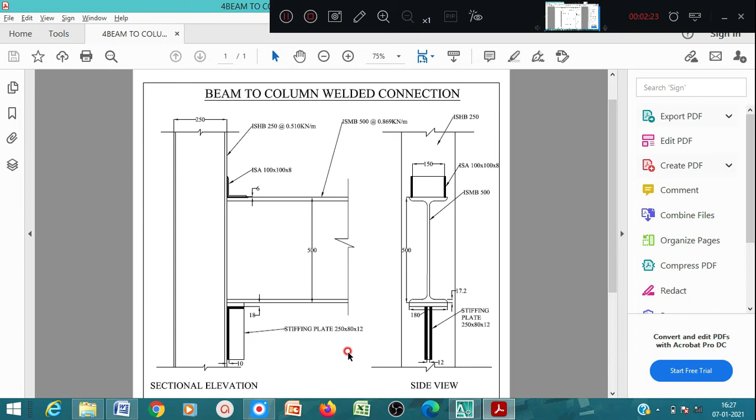So once again we'll have a view of the beam to column welded connection. We have the top cleat angle ISA 100 by 100 by 8, and the bottom part which is very important here.

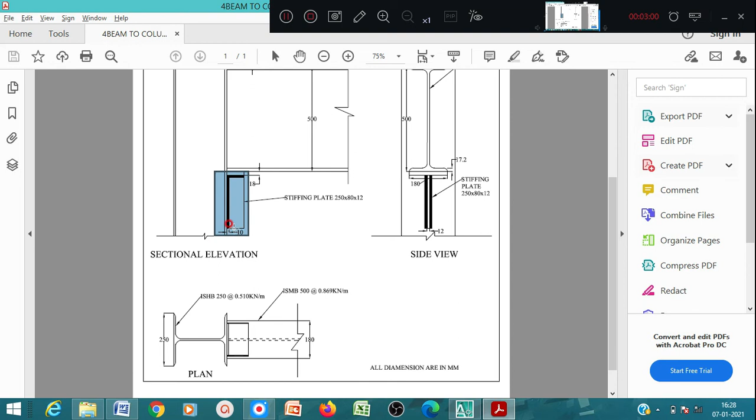Here we can see the bearing plate of width 150 mm, and below that we have the stiffening plate. The size of the stiffening plate is 12 mm thick, 80 mm wide and 250 mm long. So you have to prepare this - 250 mm long stiffening plate. Other things remain the same.

Now we'll begin with the AutoCAD drawing. I have already prepared the line-out for beam and column - you have to prepare the same thing. You can use layers and colors for different activities. For beam I have used green, and for column I have used red color. For other sections, angles and bolts you can use different colors.

Before starting, you have to fix the units in millimeters, and set the limits. You can give 50,000 by 50,000 for that, or even 20,000 by 25,000 since the drawings are very small here. You can go with 25,000 by 25,000.

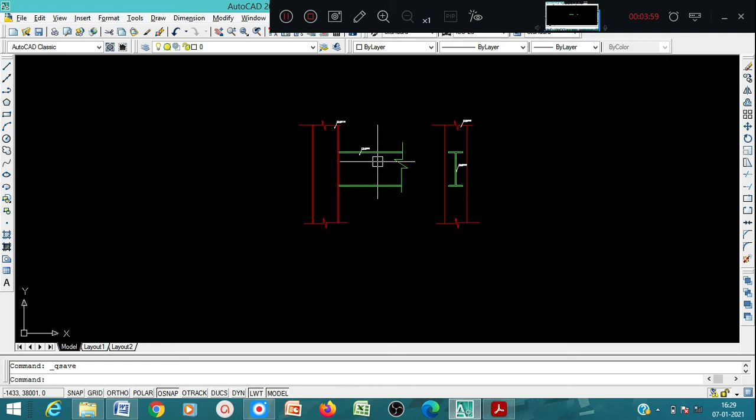After preparing the beam column line-out, we'll go for the connection part. In the connection part we'll draw the cleat angle first - it is given as ISA 100 by 100 by 8.

For that you can use offset - offset 100 this way, and 100 this way. Then the thickness of the angle is 8, so 100 by 100 by 8. Sorry, this side it is wrong - so offset 10 mm. Later we can trim this.

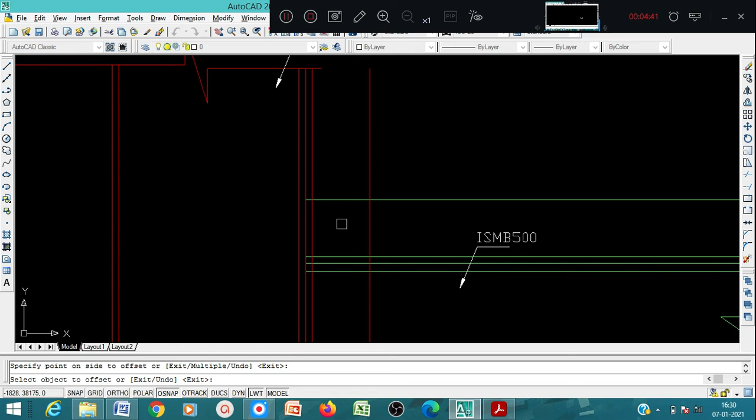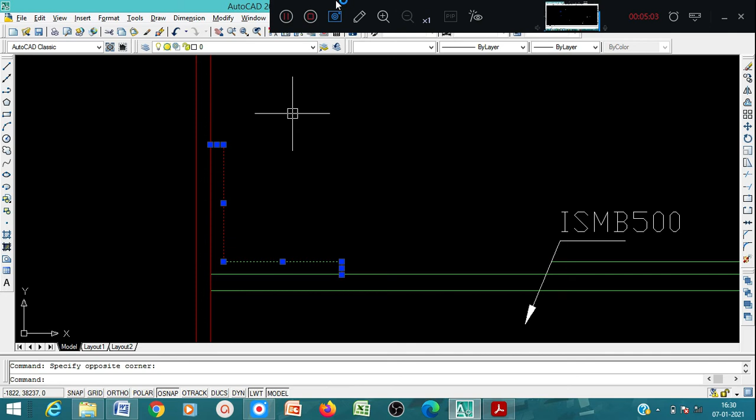Now you can delete this. We'll change the color here, make it yellow color. You can give yellow color, and if you want you can change the line weight also. Then it will be here also - we can give the color and the line weight.

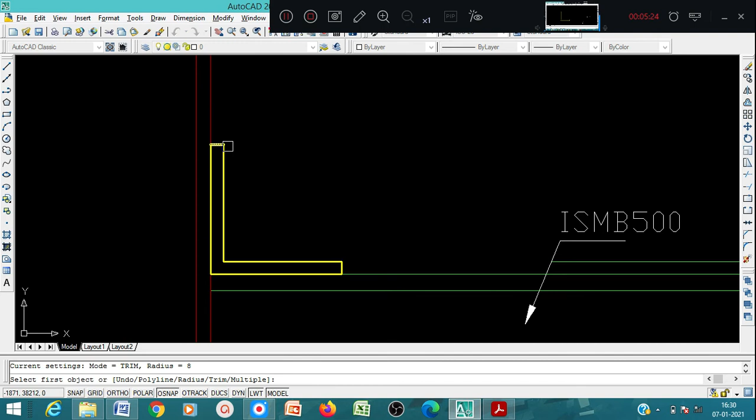Now again fillet - you can see there is a smooth curve here because of the fillet. So this is regarding the cleat angle.

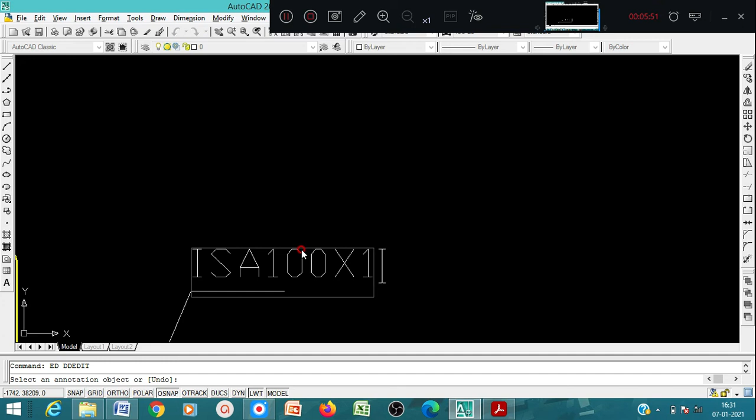You can write it immediately here if you want - keep it here and write ISA 100 by 100 by 8. Okay, this is over now.

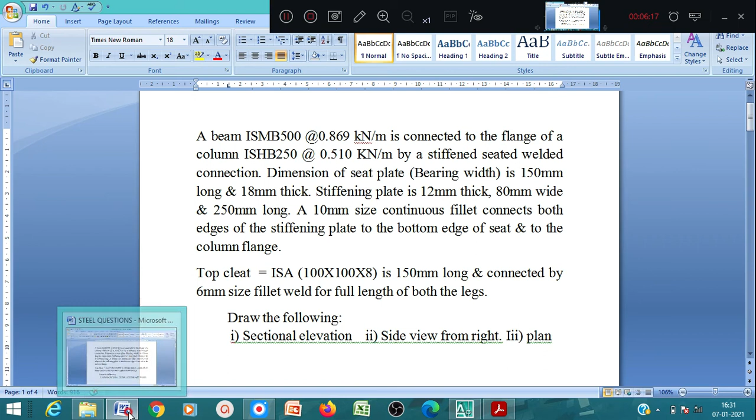Now after that you have to show the plate - the stiffening plate and the bearing plate. This plate is given in the statement: we have the bearing plate of 150 mm long and 18 mm thick. We can see the thickness here in the cross section elevation - we can see only the thickness.

So offset of 18 mm thick here - we can give offset of 18 mm. Sorry, here it is wrong, so we have to give from bottom, offset 18. And from here it is 150.

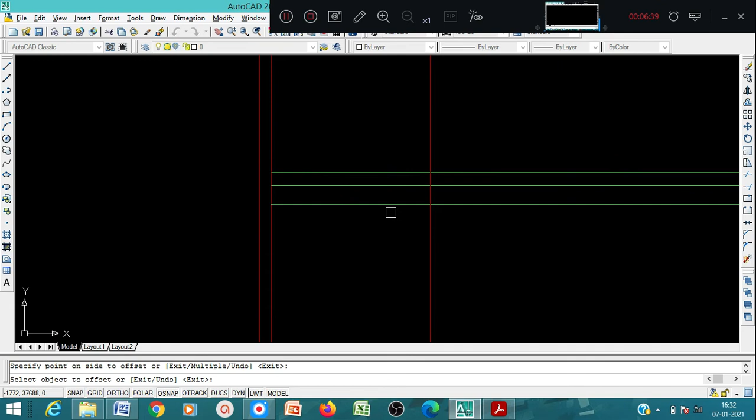So you can make this in white color if you want. We'll make it in white color. So this is regarding the seat plate.

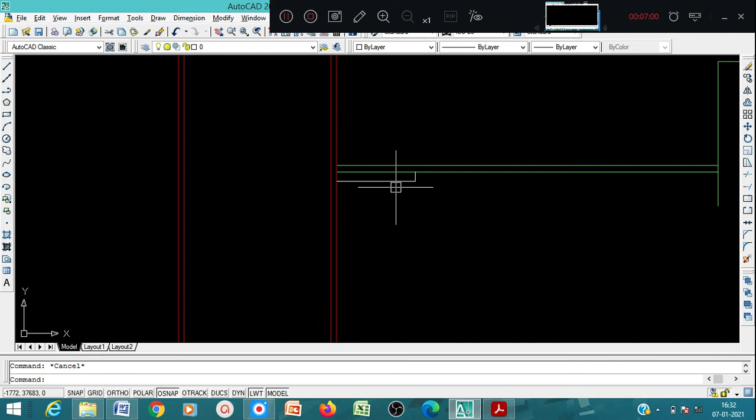Then we have the stiffening plate here, 250 mm long and 80 mm in width. So from here offset 80. And long it is 250, so offset 250 from here. So we trim it.

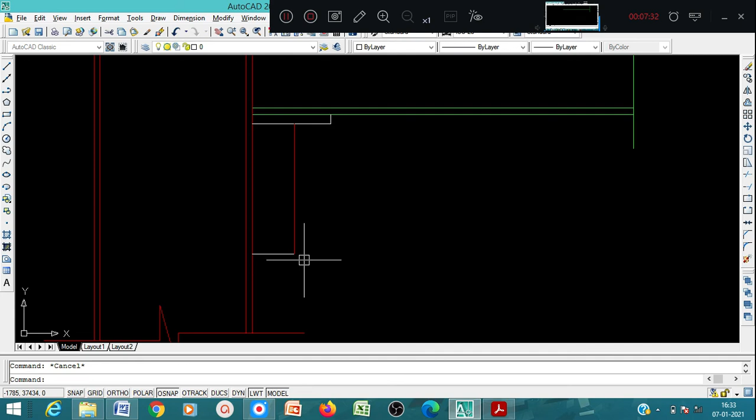Yes, I'll give this for... I can use this color. So this is for the stiffening plate.

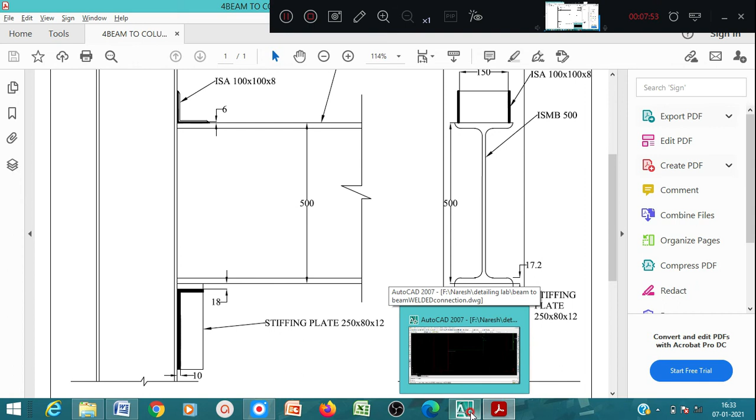Apart from that, we have to show the welding here. What you can see in the black color, this part is welding. Same way you can draw and increase the line weight here. You can draw a line from here to here and show the welding. For that you increase the line weight like this. So this is nothing but welding.

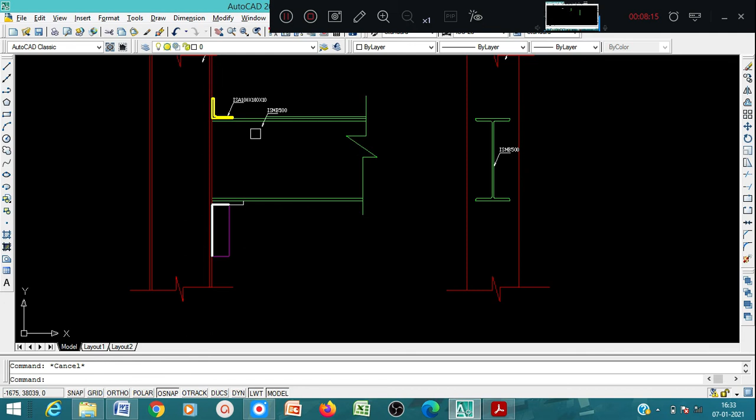So this is regarding the cross section. You can write the detailing part, so that you can copy same here. Write stiffening plate.

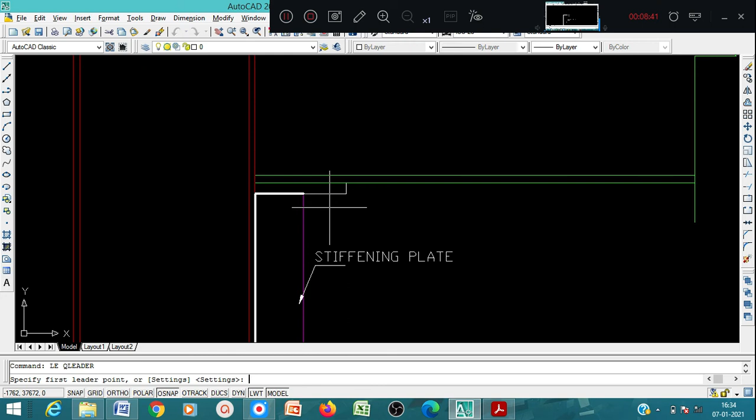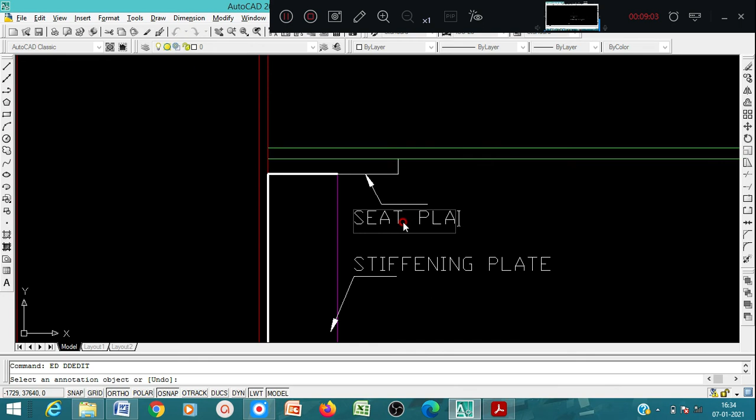Then we have here, seat plate. Stiffening plate and seat plate, and this we have. So we can show the dimensions also later.

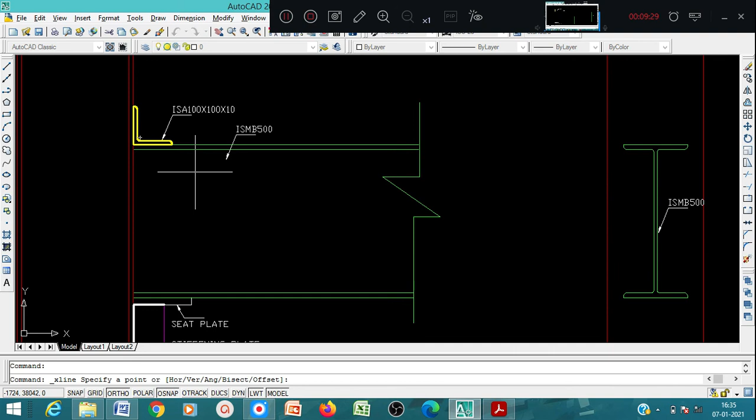Now we'll have to draw the side view. In side view, first of all, this angle. What you can do, you can extend these lines by using the construction line. You click it here and say horizontal edge, enter. So this and this and this.

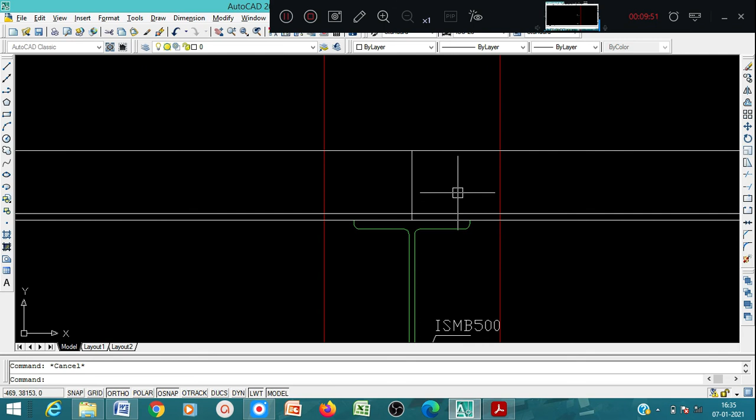So for this the length is 150 mm. You have to show the length is 150 mm, so 150 here. From center here it is 150. So offset 75 on both sides. Now we'll trim this and edit. I delete this also, and I'll match property of this.

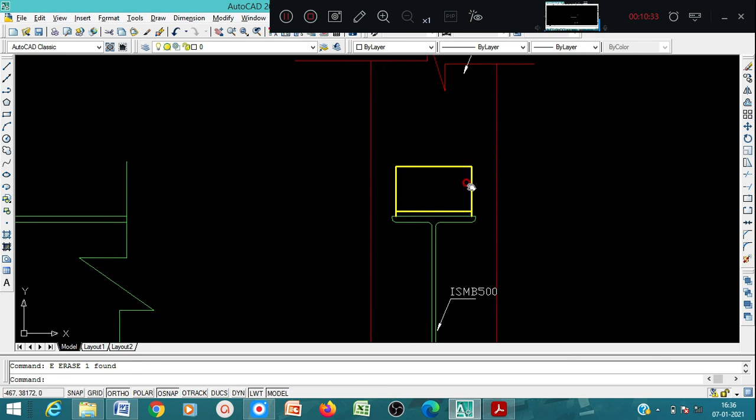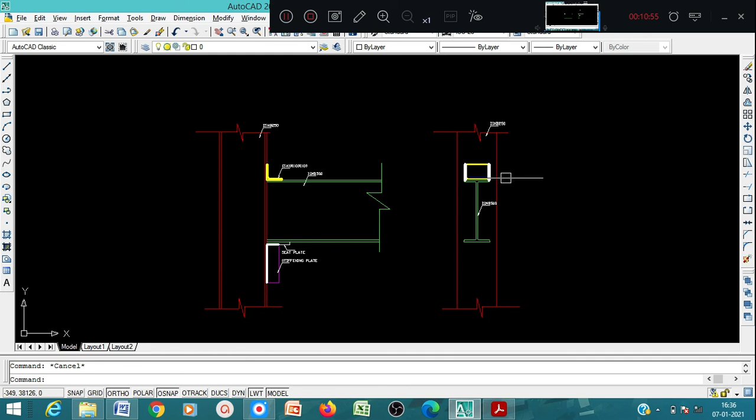Then over that you have to show the welding also. So we'll draw one more line here. For that I'll give... copy same here. Yes, welding. So this is for welding. I have to show same here, so I'll copy this.

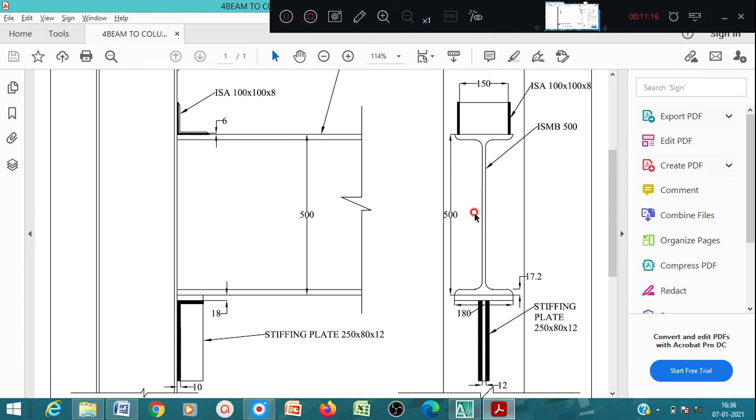Now down you have to show the plates, like this, for this. So for there it is 250 long and 80 mm wide and 12 mm thick. So in the side view we can see the thickness.

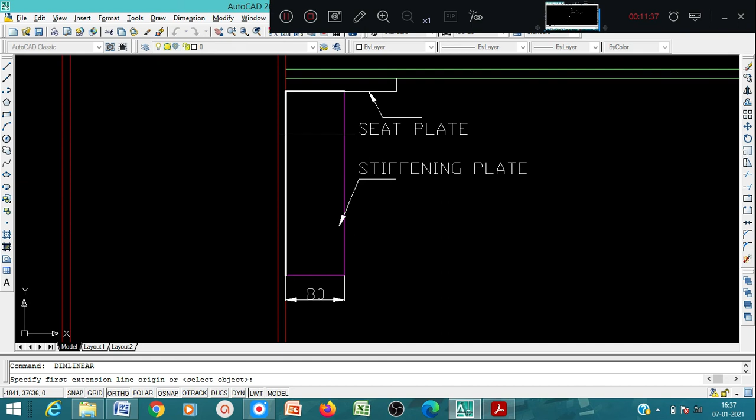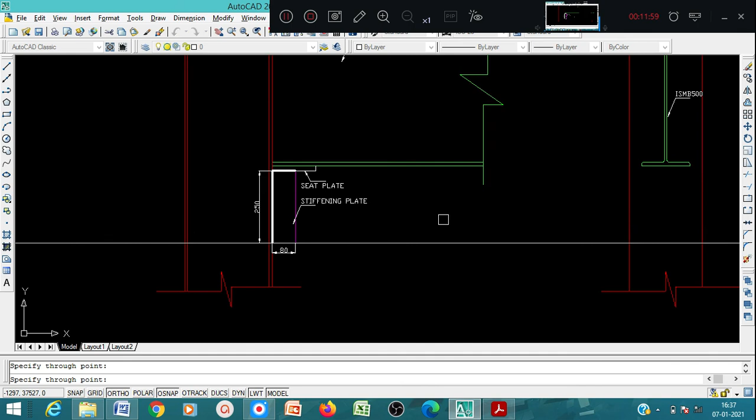So for that again I'll use construction line for the extension of lines. Horizontal construction line, yes, like this. And this also you have to show it. So this I'll trim here. I can delete this now. Now this also I'll trim it.

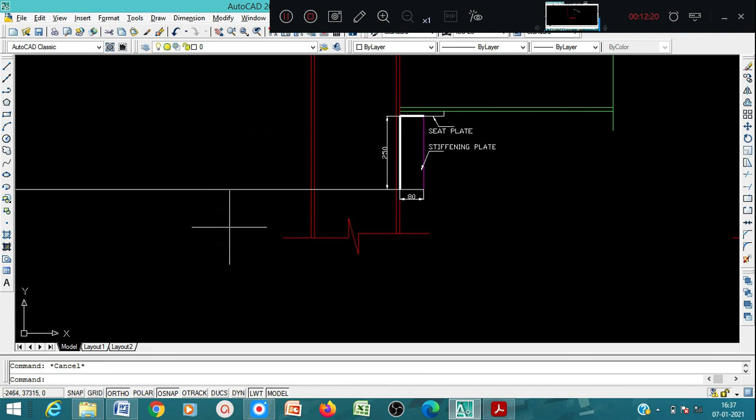Now the welding, the two plates, the plate thickness is - if you see in the statement it is given, the stiffening plate is 12 mm thick. Now if you go here, offset this side 12 and this side 12. So we have two plates, and we have the welding over that.

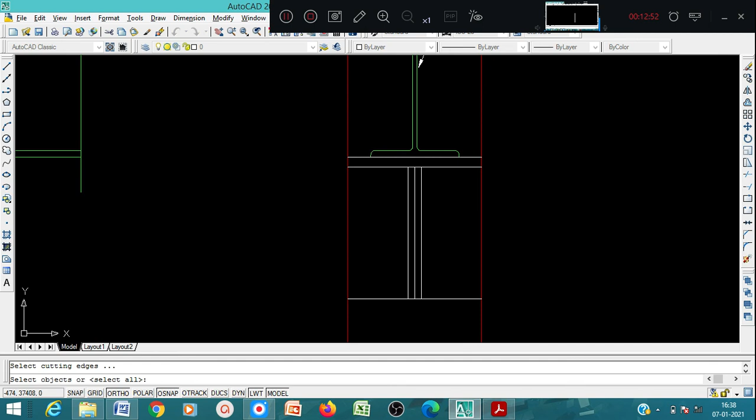We have the welding, so I'll show the color here. I have used magenta. You can see here, so I can copy this stiffening plate, same. And even you can show the dimensions also.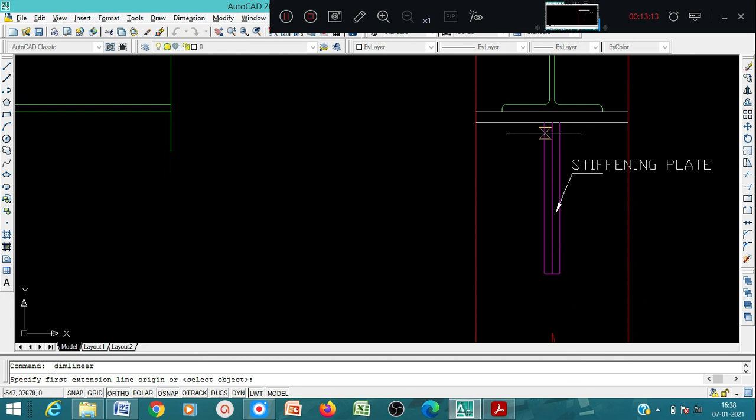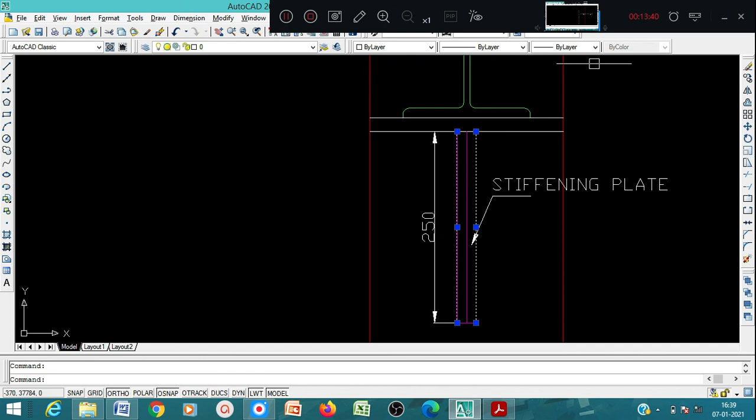Okay, so it is 250 by 80. And the welding part, it is the welding provided between. So I can show in other color. We can show it here like this, where we have, and here we have. You can select those and show it like this.

Okay, so the welding, and this is regarding the, this is for the bearing plate or seat plate. Show it here like this.

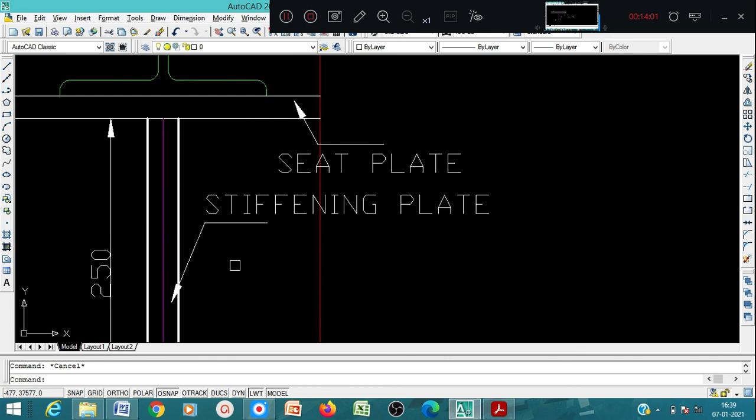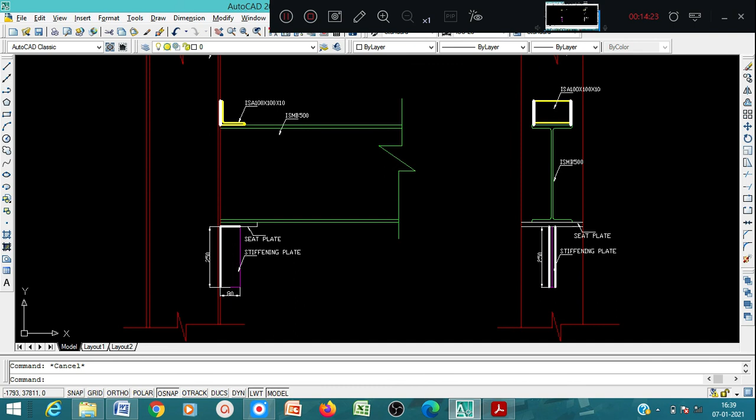And we have the angle ISA. You can show same here. So this is regarding the side elevation. And even the welding part also you can show.

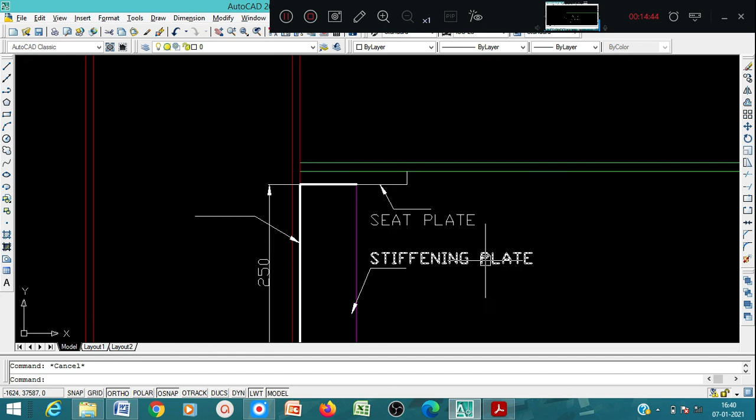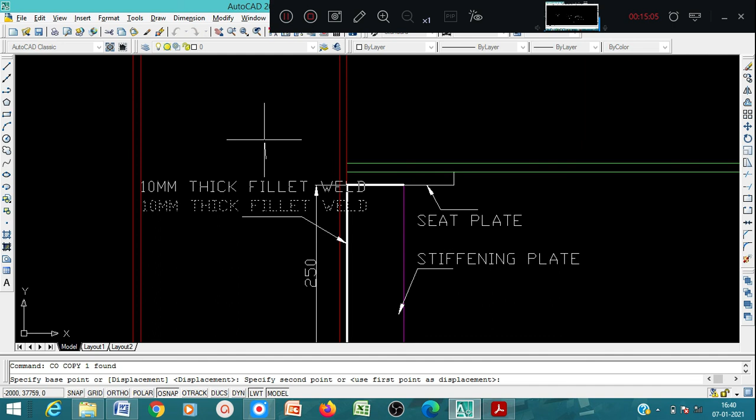Here it is given 10 mm thick fillet weld. You can show here if you want. So I can copy this here. You can use the leader command. Can adjust here. Show it like this. So this is 10 thick fillet weld.

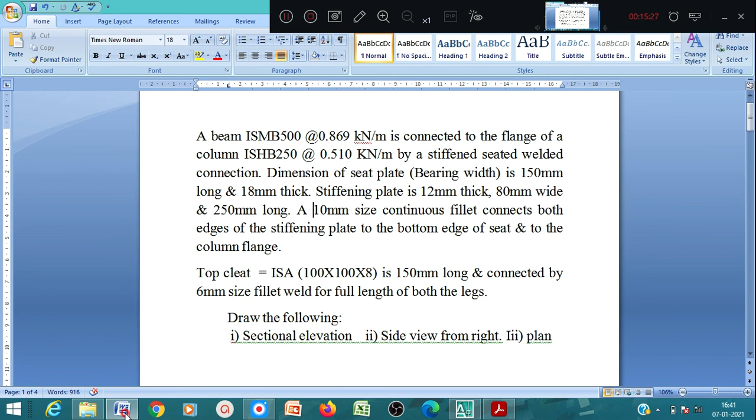And for this I think we have a 6 mm size fillet weld. Here it is mentioned 6 mm size fillet weld, so you can use here. So you can copy same here and show it here. This is 6 mm thick.

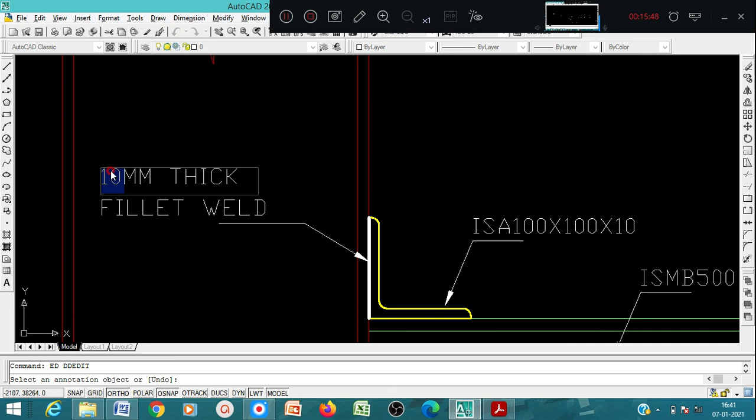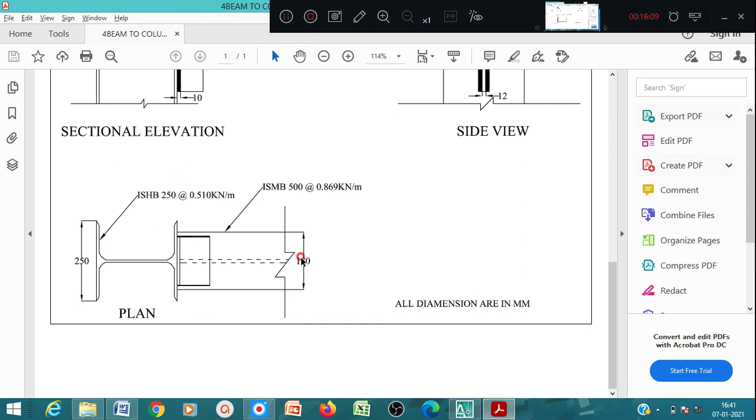So same here you have to prepare the plan. I have not shown how to prepare the plan, it is easy compared to sectional elevation and side view. I have explained about the sectional elevation and even side view. So you can use this and you can prepare the plan. It is very easy to prepare the plan.